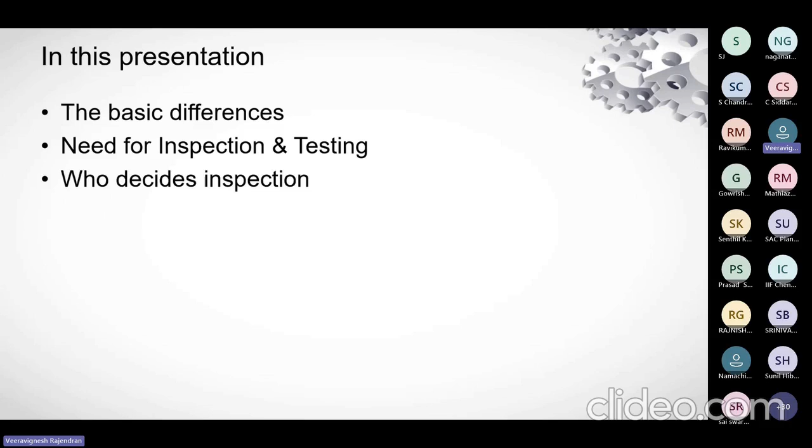Okay, in this presentation we'll see the differences between inspection and testing, why we need to do it, and who decides the kind or type of inspection we have to do on castings, be it finished products, in-process products, whatever it is.

Then the part of quality assurance and quality control in inspection and testing - who decides what, and what is the major gap? We have been doing testing and inspection day in, day out. As we speak, inspection and testing is going on. Yet if everything is inspected and tested as per the decision and agreement, we still have issues. Where does that arise from?

That's what we're going to know about in this major gaps section, and then how do we bridge the gaps? I'm proposing some methodology to bridge gaps, and then we'll talk about standardization and upgradation - the way we approach things. Most importantly, quality is not free, quality is costly, and there are ambiguous discussions on this, but nothing here is free. Something always comes with cost - you add or you reduce, it always has an implication on the cost.

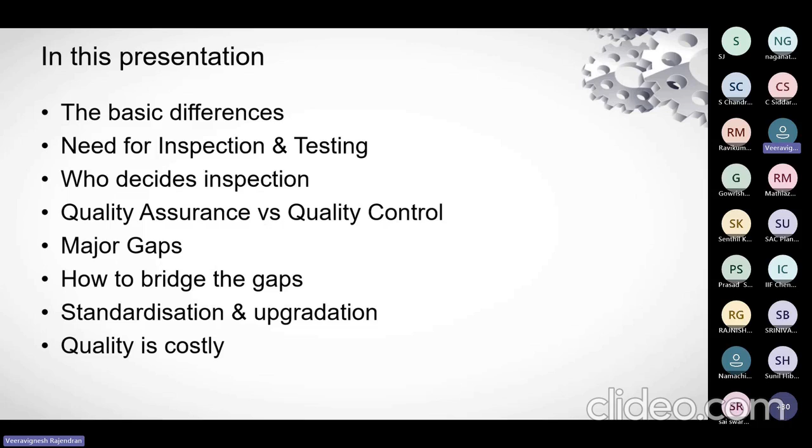So the basic differences between the two terminologies we often use interchangeably in foundries - they are two different things. Looks like they perform the same function, but they are different. There is something called testing and there is something called inspection.

Testing involves an evaluation - that means you check for strength, hardness, microstructure, which is closer to functionality. That means you are measuring the performance or functional requirements of a component. That is what testing is.

Inspection is just detection - detection in the sense of yes or no. So it's more of an attribute kind of activity, while testing is more related to performance, durability, and life. Inspection, as I said, is about looking for non-conformity only.

It either works with a comparison chart - say I want 12 mm, is it 12 mm or not 12 mm? Yes or no. You may have some reading of how much no, how much yes, but still it's confirming checking for conformance, and it's going to be mostly yes or no only.

Methods used: testing involves a lot of equipment, a set procedure, universally accepted working instructions, and the way of reporting and parameters to be tested. But inspection is more of simple equipment, mostly visual, and it compares against standards - it can be a physical standard, a comparison chart, or maybe electronic means also.

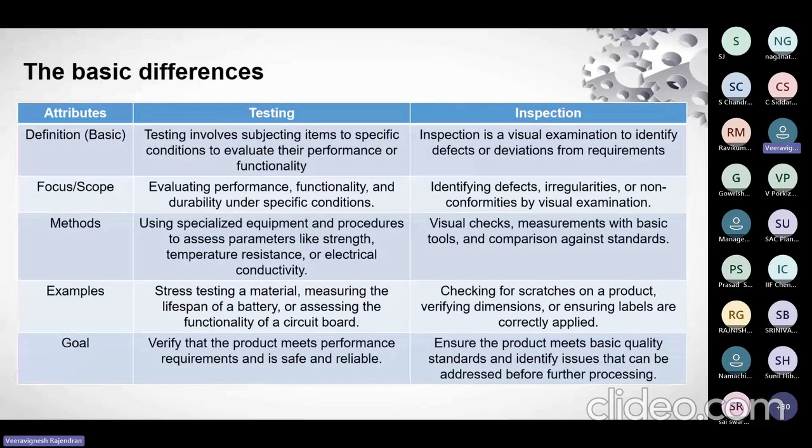What are the sources of inspection and testing? Where does this start from - who tells you, or where does it start? The source of inspection or testing is generally technical documents, because technical documents specify what is required and what should come along with the component or part. That becomes the major criteria, and testing or inspection is part of confirming the technical requirements.

So that comes out of the technical documents, and needs from the customer - expressed and unexpressed. We always see the customer give us an email with technical documents saying meet this strength, meet this elongation, meet this dimension requirement, this much machining allowance is accepted, and this much surface finish is accepted.

Yes, this is written, but what is not written is what he does not tell you but still expects from you. For example, in some locations he may have specifically mentioned that a certain surface finish level is accepted. But he might be expecting that since the entire casting is from a single mold, if one area gives better surface finish, why can't you give the same surface finish to the other area also?

That may not be implied or written on the paper, but still this will be an unexpressed expectation from the customer, and guidelines from the supplier. So what is a customer? A customer is a person who buys material from you, and he would have given some

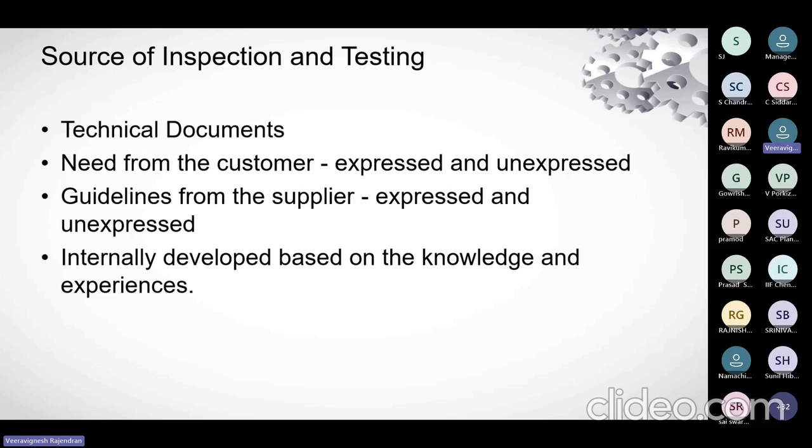For example, an additional chill wedge test. Preferably, no customer would have told you to do a chill wedge test, and your supplier also would not have prescribed it to evaluate their material. Rather, on your own experience over a period of time, you would have developed the system that yes, when I do my chill wedge test, or my thermal analysis, or my simulation, or my sand incoming quality checks, my product is going to be okay, irrespective of somebody telling me.

So that is developed based on knowledge and experience gained, and compliance to external bodies. This is mostly a kind of repetitive test or conformance test rather than a performance test. So we have been talking about the source of inspection and testing.

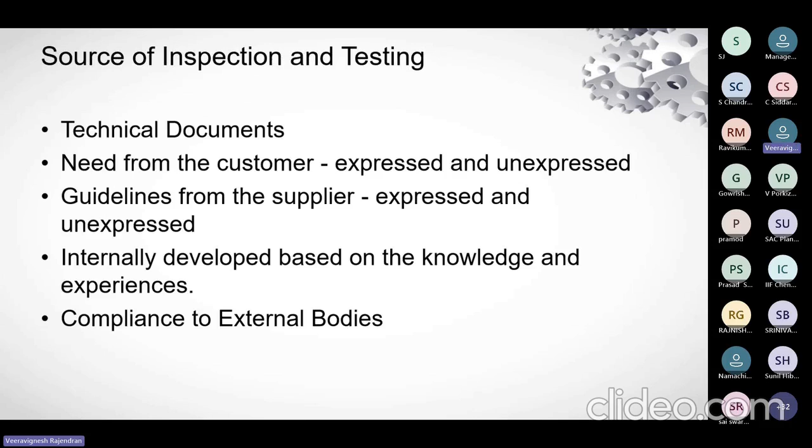Now you will be encircled with these kinds of documents which move around you. You will be using at least one of these terms every day: PPAP, technical review sheet, design records, engineering change documents, engineering approval, DFMEA or PFMEA, process flow diagrams, control plan, MSA studies, dimension results, laboratory reports, part submission warrant. There are many more, but I've picked only specifics. These are things which circle around you, and they contain data that tells you to do an inspection or a testing.

So the previous ones are the sources who generate requirements, and these are the means which tell you yes, this is what is to be tested, and this is what is to be inspected. So when you have all these tests or inspections required out of a casting or any finished component, you sit down, make a plan, and derive it: yes, this is what I'm going to do, and this is what I will not be doing.

I'll communicate this to the customer: yes, I will be accepting this quantity and this frequency of testing. So this discussion generally happens after you go through, or you do, any of these documentations at the start of testing or in the process of making the castings.

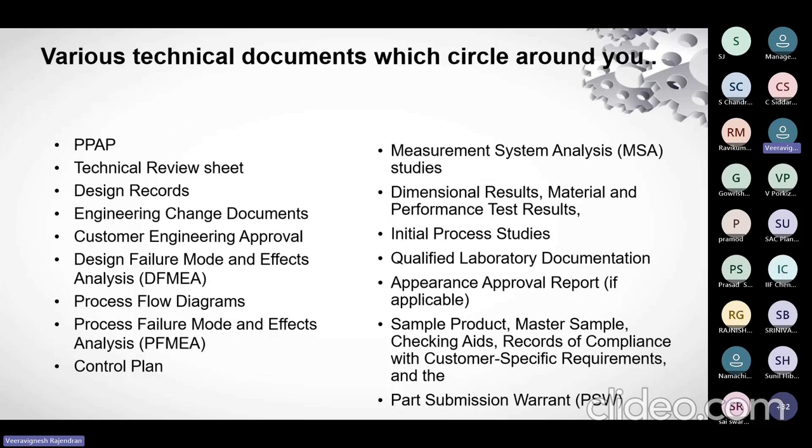So now let's get into inspection and testing. Who decides the inspection and testing? First the customer, then the supplier, then external agencies, and the organization itself, saying yes, I'll take up this testing. Who influences all these things? Customer, supplier, external agencies, organization, and the person performing it.

Here comes the skill level or competency level of the resource being used to perform the test. Resource, in the sense I mentioned as person, means both man and machine: the methodology you perform, the equipment or tool you use, and the person performing it. So this influences the testing or the output.

And who performs it? Probably the quality team in any company or organization. The production team sometimes supports the quality team in performing this, because there is a department called process in some organizations, which is an intersection between quality and production. And third party agencies also, yes, some of your tests are being outsourced.

And then the customer: after you perform all the conformity tests at your end before dispatch, confirming that this component is as per what you require, the customer also receives it and performs a similar test the way you do, to accept that you have done it the same way they expected. The customer also performs the test. So there are so many people involved—who is responsible for everything? It is actually everyone.

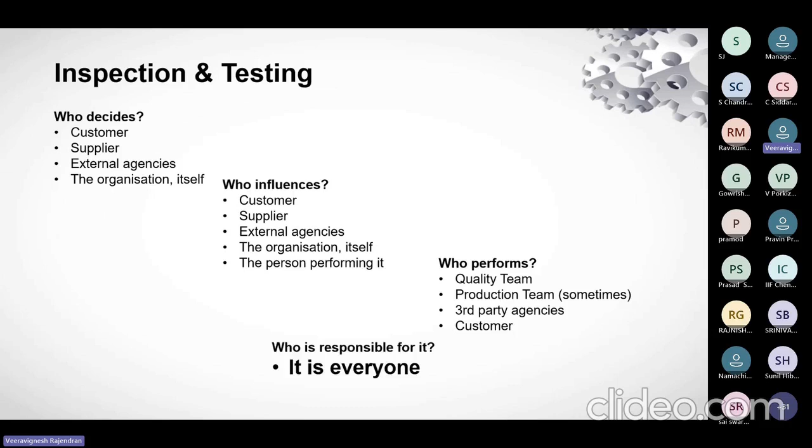So let us talk about the different types of tests we'll be doing. Any foundry, any manufacturing industry will be doing variable type and attribute type tests.

Variable type is just numbers. It will give you 20 megapascal, 30 megapascal, 50 megapascal. And attribute type is yes or no: Is there a defect? Is the sand inclusion there or not? Is there any shift in the casting? Is misrun there? So some type of tests on the shop floor after knockout, visual inspections are mostly attribute type.

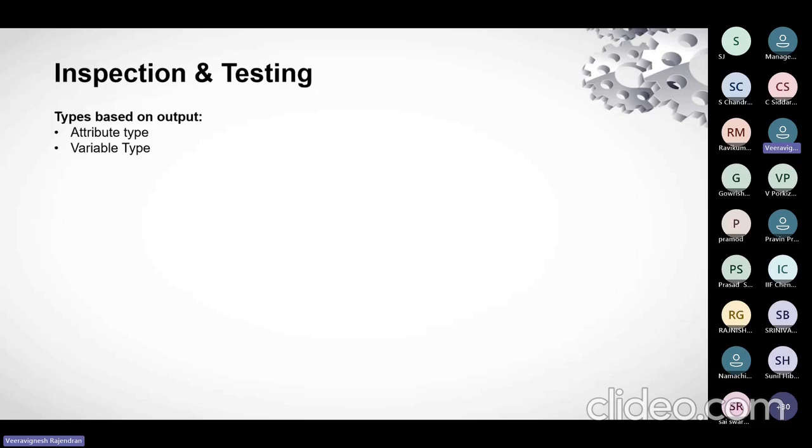Variable types mostly give you numbers like strength, hardness, scratch hardness numbers, and moisture content in the green sand or prepared sand. So all these numbers are variable type, where the output is not yes or no, it is going to be some numbers.

Based on the characteristics, it is going to be dimensional, mechanical, metallurgical, or functional. Some standard testing parameters also fall under metallurgical because that directly affects the functionality and property of the casting. So it is basically dimensional, mechanical, metallurgical, and functional. Functional in the sense a destructive test, which is beyond the metallurgy scope, is categorized as functional.

Based on the type of test being done, you do a visual inspection. Sometimes you do destructive testing, cut samples, section analysis. Sometimes you do non-destructive testing, which includes ultrasonic testing, dye penetrant test, magnetic particle, and eddy current. All these are non-destructive testings.

And some are direct and indirect tests. Direct tests are where you know the parameter to be tested, and that is the output you get out of an inspection or testing. But indirect is where you are intending to get one output of the test, but there is not a direct relationship. For example, you're looking for a defect and you do ultrasonic testing.

You actually don't see a defect directly. You see some graphs, some deviation in the graphs, the peaks that show. So that is a type of indirect test because you're not seeing a defect, but you are seeing just a change in the characteristics of the wave or current. Whereas when you look into penetrant testing or magnetic particle inspection, those are direct tests. You have a defect, you're looking for the defect, and the defect exactly shows up. Here it doesn't show up directly, it shows up in a different way. So this is direct and indirect testing.

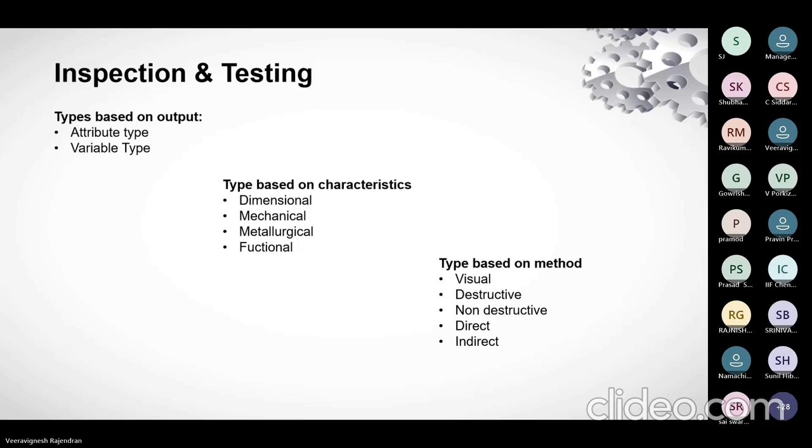So many types of inspections and testings are performed on every casting in foundries. So where does quality assurance and control come into picture? We know very well that quality assurance is the team who ensures that at any point of time the process will not give any non-conformity. If there is any non-conformity available, then quality control catches hold of that non-conformity, identifies and characterizes its source, and then takes steps in the process ensuring that such non-conformity does not recur.

That means assurance tells you that this process cannot give a non-conforming output. Quality control tells you that though the process is set, I will have an intermediate step in the process looking for non-conformity. The output of quality control is zero defects. The output of quality assurance is setting the process to produce zero defects. So quality control and assurance go hand in hand. When one's job ends, the other's job starts, and the same way vice versa.

With respect to inspection and testing, the person who decides the type of test or inspection is QA, because the requirements are known to QA at the start of manufacture. So they decide how I am going to test, or how I am going to inspect, and how many inspections I am going to do. That is decided by QA.

The required resource, skill set, and competency -- the type of test to be done is already decided, so how do I implement it, how do I execute it, what do I need to execute that -- is generally decided by QC. For example, I need to do a hardness check 100%. To do the hardness check, what all do I need? Having a person, having a machine, and the right person and the right machine. So all these things, and the quantum of inspection, are decided by QC after QA.

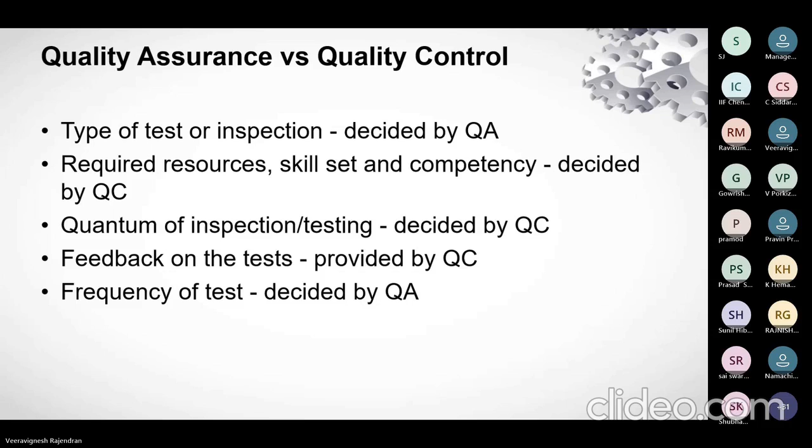We know the type of tests, what is to be tested, how many types and how many number of tests to be done, who the end customer is, and what is expected. Yes, everything is written, but still we have some problem. So where does the gap arise, and what is actually to be filled? Not expressing or explaining the reason behind or the science behind the need. Here, need means the need for test or inspection for conformity. Why am I doing this test?

Any customer or buyer will ask for one tensile, one hardness, one micro, and one impact test if required. You might also look for sectioning of castings for soundness check, RT at specific locations for soundness, UT for subsurface defect detection, and 100% penetrant testing. All these tests are required and written on paper or an Excel sheet, along with the frequency—say 1 in 10 castings for the PPAP batch, then 1 in 20 or 1 in 30 for the first production lot, and once production starts, maybe once a year for RT, once a year for section analysis, and one per heat for the rest. All these things are written in the paper, and the foundry accepts it—yes, I will do all these things. The document gets exchanged, signed, approved, and the foundry starts producing.

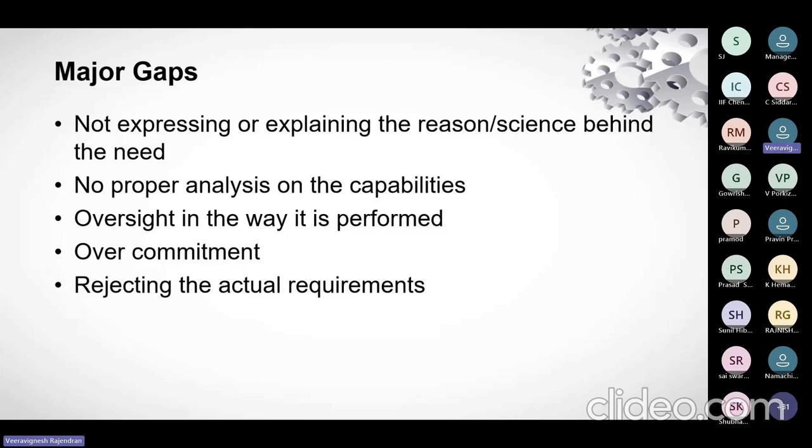It is expected to be like that, but not every time. What if that particular component of that particular lot does not meet it? So sometimes we end up rejecting the actual requirements and not correlating between the results of inspection or testing.

You have hundreds of numbers, hundreds of outputs of inspections and testing with you. Do you find any correlation? There should be a correlation because all these things are produced out of a particular set process or a standardized process. So if you are missing that correlation, then that particular process of inspection is incomplete, because you are not taking any feedback.

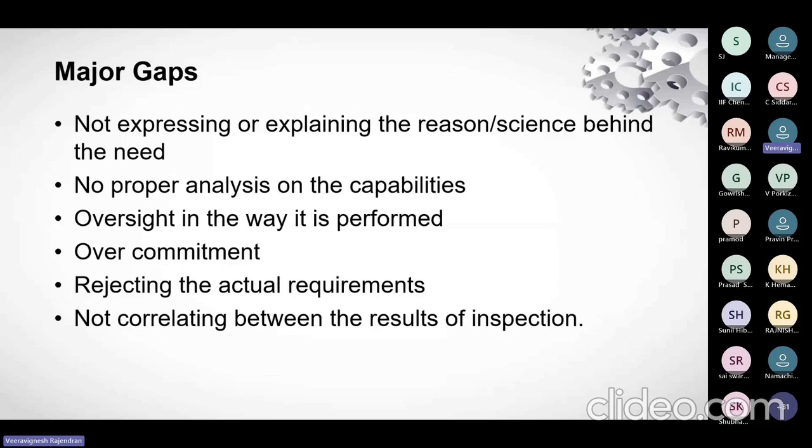In the forthcoming slides, we'll be seeing it. So the missing thing is: you do inspection, you do testing, and there is something called analysis, and there is something called feedback. The preferred way is you do all these things, analyze the data, and take the feedback. Everything being okay is also a feedback.

You should tell back to your system or process that whatever you have been doing on this component or this particular manufacturing technique is good, very good. You sustain the same, you ensure that you don't deviate. That is the feedback you should get after getting all the data being okay.

That means 100% conformance. But what generally people make the mistake of doing is: I do a test, I immediately take feedback. I do an inspection, I immediately take feedback. I don't analyze, because only when you start analyzing do you look into whether you have done the right amount of testing in the right way. So sometimes there can be aberration.

Not all the tests are true, not all the tests are correct, because every test or inspection comes with an error. There is an error in everything, so there is no absolute measure or absolute measurement. Whenever you skip the part of analysis, you tend to give wrong feedback. Either you reject the right material or you accept the wrong material. So that comes into the picture.

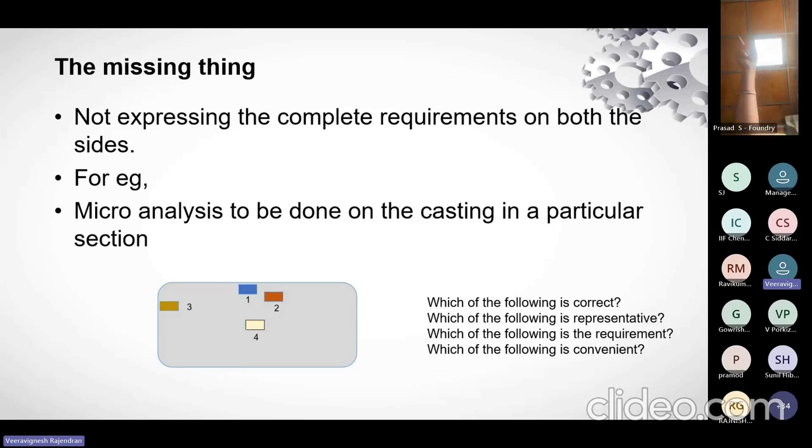For example, some people look for carbide, some look for steadite. If steadite phases are available, report it as 1%, 2% as per standard. If there is no steadite, report as no steadite observed, rather than not filling the column. Some people try to not report when the feature is not available - if no steadite is present, why should I write no steadite present, I'll avoid writing it in my report. But it may not be accepted because sometimes the customer wants the same word or terminology to be used, and then just say present or not present. So this is one ambiguity any foundry will have, and they'll have to get over this.

One more example is chemical analysis. There has always been a dispute between manufacturers and buyers of castings, because chemistry - you take a coin, analyze it in one spectrometer, take the same coin, go analyze in a different spectrometer - the results are not going to be the same.

The most problem-creating element is carbon. Everybody knows carbon from spectrometer is not as reliable as other testing techniques like combustion technique or thermal analysis technique. But still, for productivity purpose and feasibility, spectrometer is the only option available for foundries to manufacture. So when the customer gives you, or when you intend to manufacture one grade, say carbon 3.4 to 3.6, it should be accepted that you will use your spectrometer with this measurement variation to certify or measure this particular range of element.

So any deviations beyond this can be discussed and settled, rather than arguing 'yes my result is correct, his result is correct' - both might be correct or both might be wrong, because we know what the spectrometer can do. Or if we have a practice of making an alternate way of analysis, that also has to be communicated and mutually agreed. So this is one gray area where you always get into dispute, and finally somebody has to make a compromise, and preferably, mostly it is going to be the foundry. So one should be careful enough.

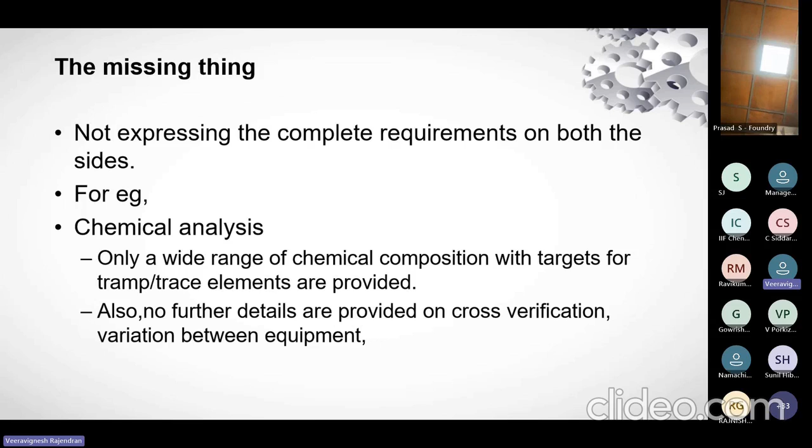The same four questions come up: Which of the following is correct? Is the type of analysis representative? These questions should always come up and then get clarified.

The next missing thing is, when you look into any failure mode analysis, whatever is done in any foundry, mostly surface defects or soundness defects are addressed - say blowhole, microporosity, shift, hot tear, cracks - all these things are observed.

But why not metallurgical parameters? This is generally because the preventive actions mentioned in FMEA will generally be what the foundry is already doing, or what the foundry can immediately do - meaning whatever facility they have, what they can immediately change or immediately do.

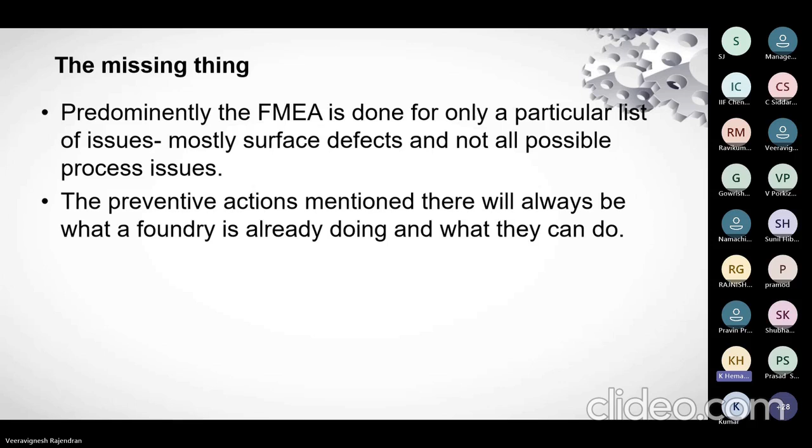Hello? No voice, Mr. Veera. Sir, Veera Vignesh, sir, your voice is low. Veera Vignesh, sir. Sir, wait a minute, sir. I think due to some network issues, he's left. We'll join within 1 minute, sir. Please, sir. Sir, our Veera Vignesh, sir, left side is unplugged, sir. Oh.

Shall I speak to the speaker or phone? Please wait for 2 minutes, sir. Speaker is on, there's some network issues. Speaker will join. Sir, am I visible? Sorry for that. Yes, sir, visible, you can continue, sir. Thank you.

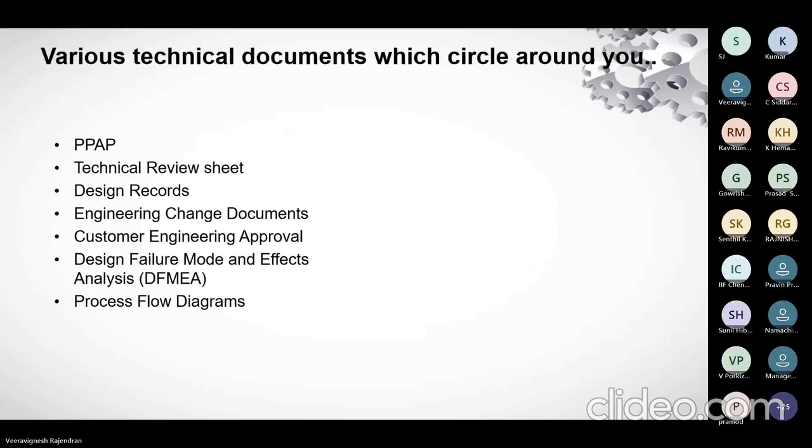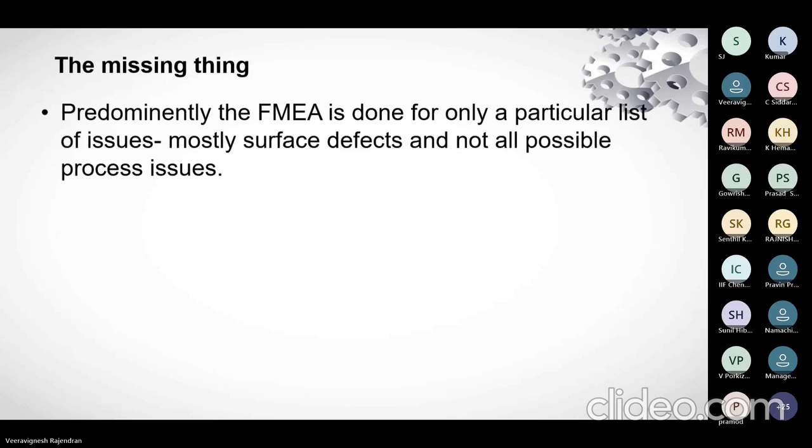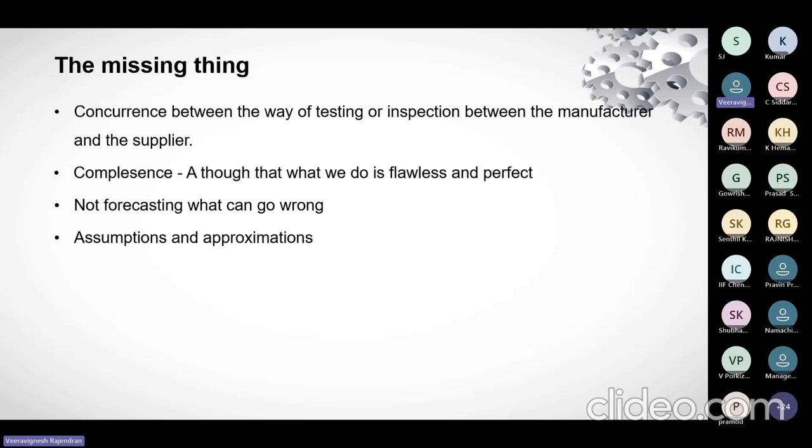Okay, and the other missing things - what will be the next problem, the future problem - is the concurrence between the way of testing between the manufacturer and the supplier. Say you perform your testing, the same hardness test or the same chemistry analysis over the sample, in one particular way, and the buyer of the casting does the same analysis in a different way. If these two do not match, you will still have the same problem, and differences come.

Complacency, yes - there is a thought that what we do is always right and perfect. That will also create a problem. And not forecasting what can go wrong - so anything you do, you should also think that something can go wrong, and you should have a plan B or ways to correct it. Not just asking what if you get a wrong reading, or what if my method is wrong. You always do some approximations and assumptions during testing, and that should also be avoided, because that can give you some loss or failures.

And revisiting and updating the FMEA with any new or improved corrective actions. Any new corrective actions taken for other problems, other castings also, then the FMEA ought to be updated, because FMEA is your parent document telling how I'll do the inspection. FMEA tells you the additional tests to ensure conformity. Yes, hardness, tensile - all these conformity tests will be measured separately, you are going to perform them. Additional tests will be mentioned, taken only from the FMEA, because FMEA tells you what additional test you have to do. Some defects would have come in the process - to avoid the defects, some more additional tests I'll do. So that input comes from FMEA only. Frequent updating of FMEA plays a major role.

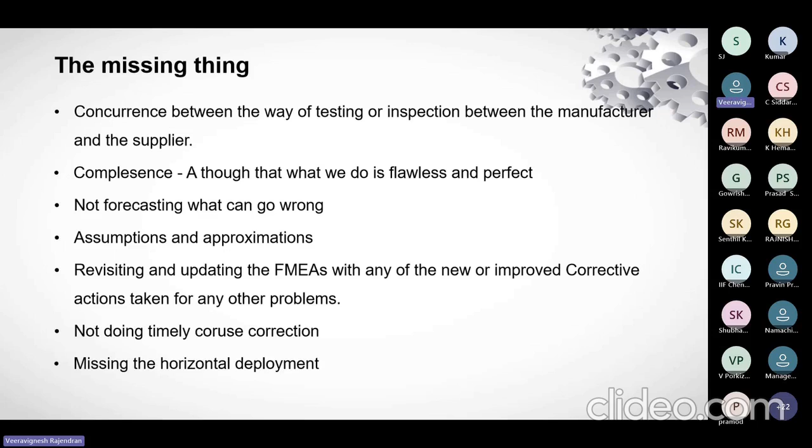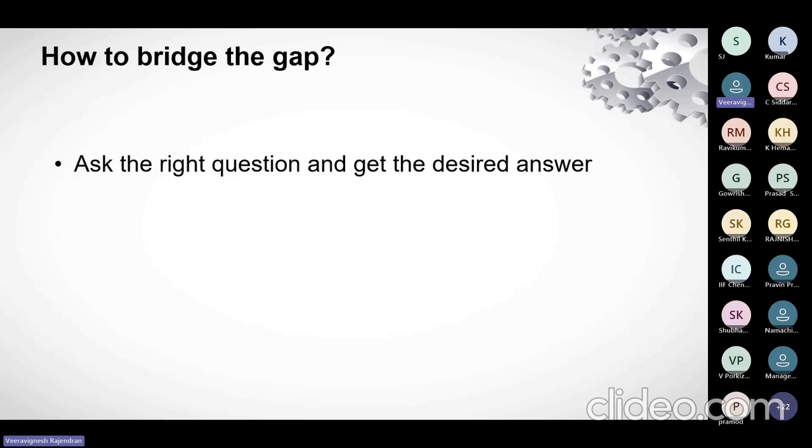So ask the right question and get the desired answer. You tell that this is how I'm going to inspect and this is what the output is going to be, and the loss in the output - say, for example, the deviation or variations in the results is going to be this much - and this is how I'm going to improve. I have an improvement plan. You express everything, ask the right question, and then get the desired answer.

And read between the lines of the provided technical documents and requirements. It will mention that yes, micro to be done, hardness to be done, but some more information is provided or hidden inside those lines. You should be able to decode that, or ask for it and get it understood and clarified.

In any requirements, if it could not be met, get an approved deviation - yes, for drawings, for changes, there is a deviation approval process everybody follows. What if there is a deviation in the testing? You know the result is the component is okay, but the test results show that the component may get rejected. In such cases, how do you take it up and get it clarified and approved? Approval for deviation is not just for dimensions - approval for deviations is for tests and inspections also.

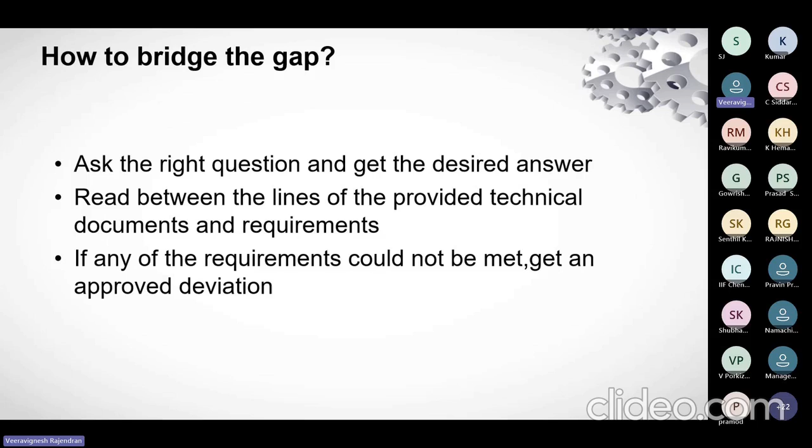Standardization and upgradation - the idea is you don't need to replicate what your buyer would be doing. It can be the quality of test and the quantum of test that your intended person will be doing. And look at every output of any foundry as a functional part, not just as a casting. You should have, not an emotional attachment, but you should know what this particular component is going to do, and if I fail to do a proper or intended inspection, what can go wrong.

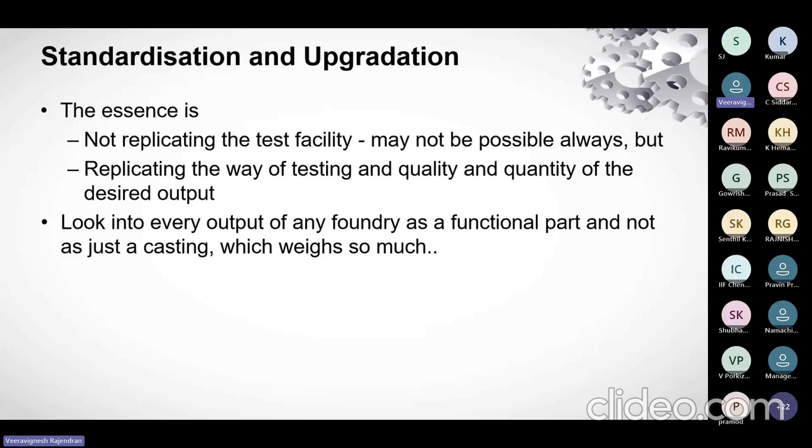Why am I saying quality is costly? Need for reanalysis increases your cost, for which you would not have accounted. Cost of rework, then reanalysis - yes, when you do a rework, you have to perform the same type of analysis you did at the first stage. That is point one, without rework. And if somebody does not believe your number, you have to prove it to them, then you have to do one more analysis - that is reanalysis. Cost of rework is, yes, you have accepted the failure, accepted the rejections, you have scope for rework, then you do reanalysis - that is 2 times the cost. Cost of increased frequency of analysis.

After you get a failure, if the test was not detected or not performed properly, some non-conforming casting has gone to the end user and he finds it as an issue and reports it to you. The first thing he would expect is to increase the frequency of testing, instead of 1 out of 100, do 10 out of 100, or 50 out of 100 analysis. So there's an exponential increase in frequency of analysis which you are not prepared for, and everybody expects this change to be implemented immediately. You may not have enough manpower or resources available, but you will be forced to do it. So that is costly.

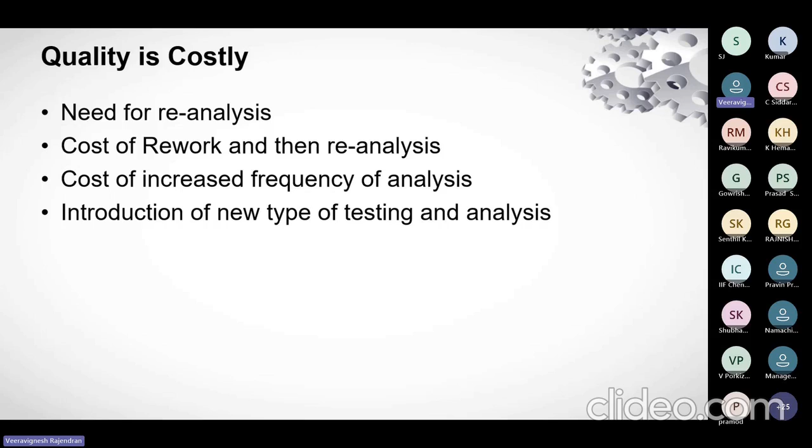Introduction of new types of testing and analysis. At the start of manufacturing you will not have any problem, everything is set, and what you can test is what you have accepted. Yes, everything goes well, then you suddenly get a rejection. You start listing new types of tests and analysis which you had not planned for already. So this inclusion of additional tests makes it costly.

You start taking short-term corrective actions as an output of your interim checks or tests. This will make it very costly because you have not accounted for these changes immediately. More destructive testing for revalidation - the moment you have a non-conforming output, you may have to do destructive testing for validation. This again will not be accounted for at the start. This destructive testing is going to cost you more because it's not just the cost of testing, it's also the cost of the component.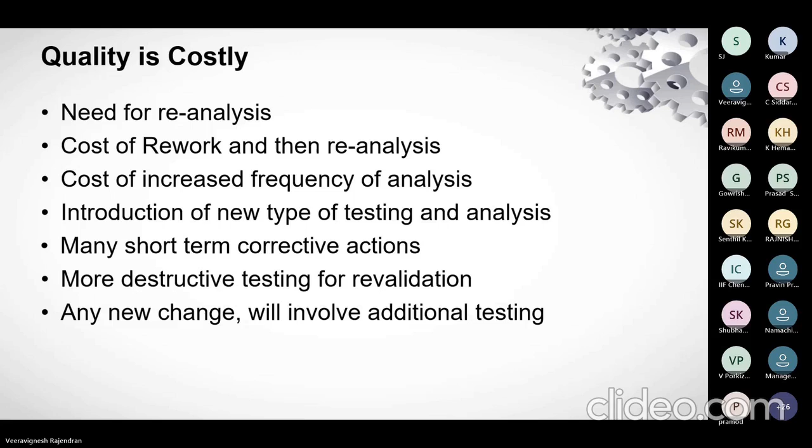Any new change, as discussed, will have additional testing. And I've come to the end of my presentation. So, my last slide.

So testing and inspection do play a vital role. A defined and appropriate plan needs to be arrived at - what is being tested, what is to be tested, and what is not to be done. And upgradation and evolution with time is to be done.

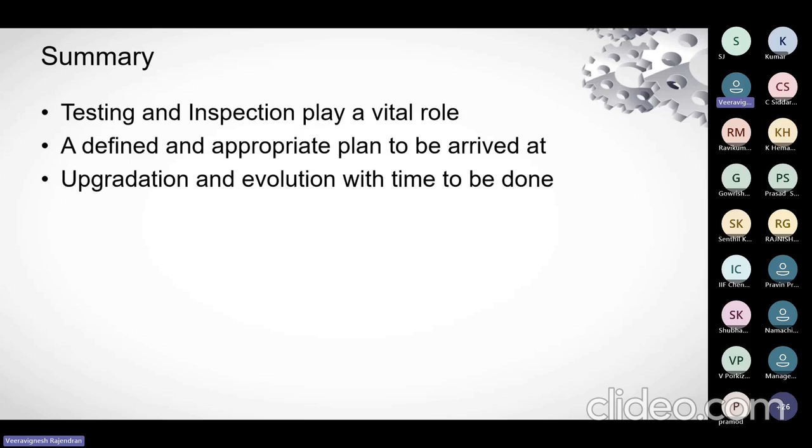Though the method may be very accurate, today's fast pace and increased speed of expectation - the speed at which output is expected - means the existing setup may not be useful 1 year from now, or 5 years from now. So there is a need for upgradation and evolution with time.

And understanding of the intended output - what is going to come out of your testing - and what is being expected by the customer or buyer should match. If not matching, then raise the flag immediately.

Acceptance levels of all types of variations is to be discussed. For this, you should have knowledge of what kind of variations you are generating at your foundry at all levels of inspection and testing.

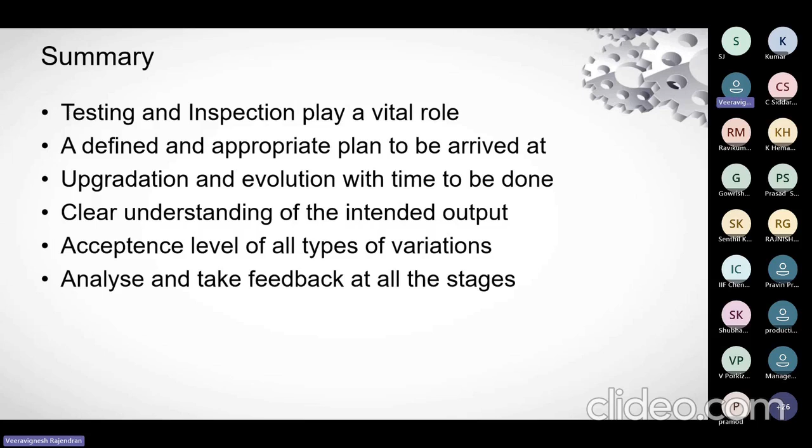Analyze and take feedback at all the stages. Even if all the testing is okay, it should confirm that yes, there are no issues. Feedback is to be taken at all locations or all stages.

And I always end up saying Tirukural because somehow I'm very much attached to those particular words, because it tells you about life. It can be applied anywhere.

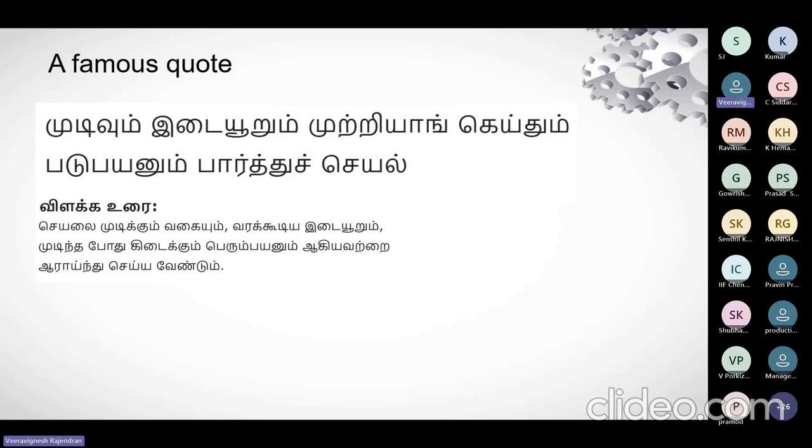I'll translate it for you: the method of doing things - that means the way you do a test, the way you perform something; the obstacles and what can go wrong - the knowledge of what can go wrong; and the knowledge of the intended output - what you are going to get as an output of this action.

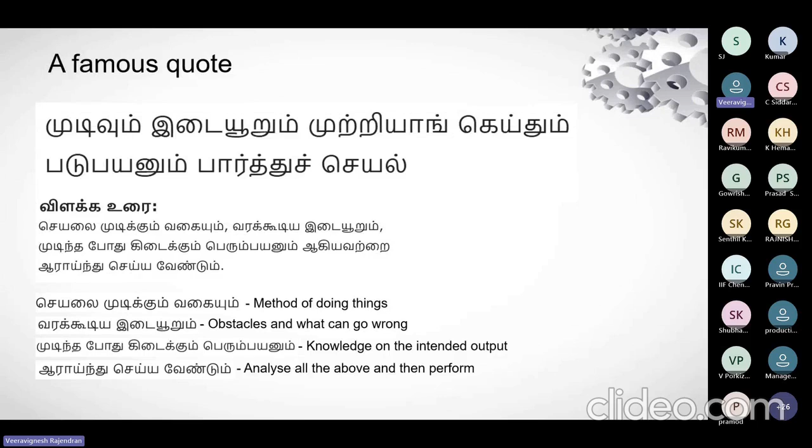Maybe testing, inspection, manufacturing - it should be analyzed, known, and then only performed. So you should know how I am going to do this, what am I going to do, and what can go wrong, and then I should take enough preventive measures and actions. And what is the intended output - I analyze all these things, only then I start my testing. If in case I miss something, I do a course correction during my performance.

So I thank you all for patiently listening to this technical webinar. Yes, I have not touched anything technical because people here are already tech experts. I don't want to continuously tell them how to do a hardness test, how to do a tensile test, how to do microanalysis - people here are very good experts in doing it. Okay, we do everything, but still there is a small gap. And how are we going to address it is what I've tried to express in these 40 minutes. And thank you.